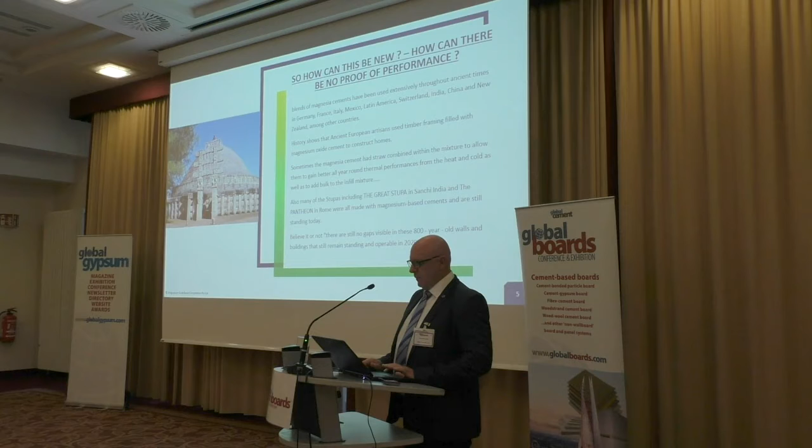History shows that ancient European artisans used timber framing filled with magnesium oxide cements to construct homes. Sometimes the magnesium cement had straw bindings mixed within it to allow them to gain better all-year-round thermal performance from heat and cold, as well as to bulk up the infill mixture.

Also, many of the stupas, including the Great Stupa of Sanchi in India, and the Pantheon in Rome, were all made with magnesium cements and are still standing today. But believe it or not, there are no gaps visible in these 800-year-old walls and buildings that still remain standing and operating in 2020.

Early magnesium cements were made with soluble phosphates from animal feces, or fermented plants and magnesia and optionally clays. These natural magnesium cements bind naturally exceptionally well to all cellulose materials, i.e. plant fibre, wood chips, etc., and were often referred to as living cements.

There is a book out there, just referenced away from this, called Breathing Walls, which is quite interesting. It's written by George Swanson. If we change the word living cement to breathing walls, it's a reproduction of what was known many years ago. This is a sharp contrast to Portland cement today, which repels cellulose.

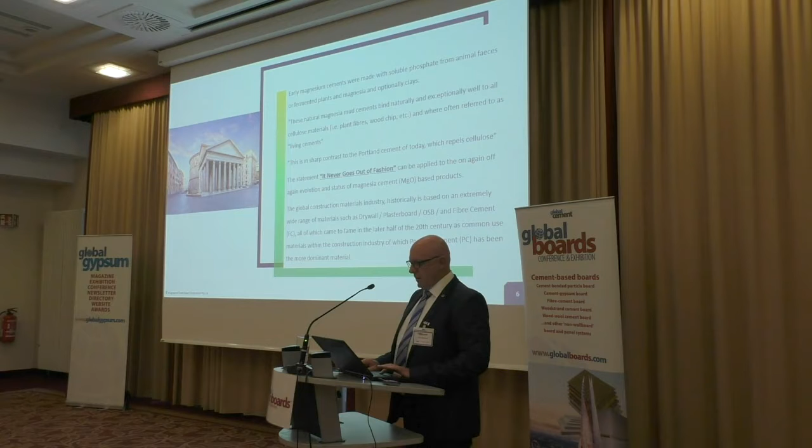The statement 'it never goes out of fashion' can be applied to the on-again, off-again evolution and status of magnesia cement, MgO-based products. The global construction materials history is based on an extremely wide range of materials such as drywall, plasterboard, OSB and fibre cement sheet, FC sheet, all of which came to fame in the late 20th century as common-use materials within the construction industry, of which Portland cement has been the more dominant material.

With the push for increasing environmental sustainability and the need for products that deliver a higher level of protection from fire and extreme weather events, we are now witnessing a renewed interest in materials that for decades have largely had niche or best curiosity value as opposed to gaining commonplace recognition and use.

This has led to research into information that has been archived for centuries, which documents the vast uses and benefits of magnesium oxide as a sustainable building material. The result of this is that magnesium-based cements, integrated with more recent advancements in modern technology, manufacturing, high levels of third-party quality control, and proven in-field performance of high-performance magnesium cement products, has industry leaders focusing more on utilisation of magnesium cement products to future-proof their projects.

Magnesium cement products versus Portland cement-based products. The carbon footprint, which we've heard about today as well, is improving, but nonetheless it's still an important factor in sustainability. The carbon footprint of MgO cement is not dependent on carbonisation during use. Its footprint is achieved during manufacture by a combination of features.

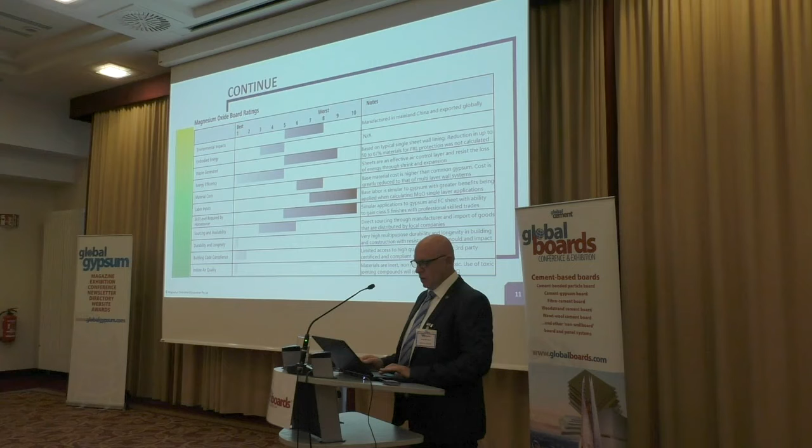The embodied energy is zero. Waste generated is based on a typical single sheet wall, so it's actually quite good. When we get into plasterboard systems, looking at fire-rated wall systems, we're using anywhere between a minimum of 50 up to 60 to 70% less material than a plasterboard wall system to produce a higher performing wall system.

In all aspects, okay, a lot of people just get their heads stuck around magnesium boards as a non-combustible board. When we talk about mold, impact, thermal resistance, CO2s, one thing magnesium cement does is it actually trumps everything to do with plasterboard. It falls very much in line with fibre cement, as we know Portland fibre cement. So there are little differences which change performance, but when it comes to performance in wall linings and reduction of materials going to waste, it's a high performer.

When we look at energy efficient air control layers, resistant to loss of energy through shrinking and expansion. To give you an idea, shrinking and expansion at minus 40 to plus 40 is less than 0.25 of a millimetre, so it's very dimensionally stable.

Later goes into materials use. I'm just going to skip through this. Sources and availability: magnesite has mainly been in China, and there are good resources for the binders readily available, whether the manufacturing was in Turkey, America, or China. The complex reason why manufacturing isn't successful in those countries is because people don't have the science or the backing of the science and technology to make their magnesium boards work.

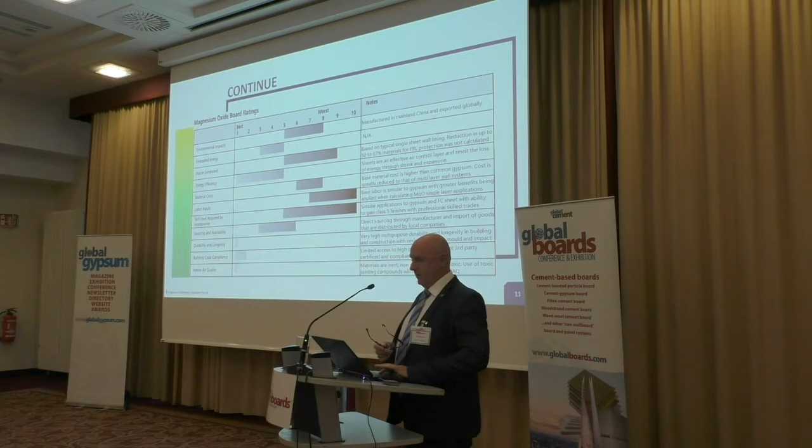Thermal mass. This is an interesting topic, and I've discussed it with a couple of people today, which has been interesting. The forum actually has a very unique, close nature in what people I've spoken to so far today, and one topic has been thermal mass and sustainability. Thermal mass and efficiency play a role in sustainable projects and are critical in delivering high levels of fire protection.

There is a strange word that is overlooked in many cases through our global building codes and is rarely used in the assessment of sustainability of projects. That word is calorific values. Calorific values are applied to materials based on the amount of heat released by unit weight or unit volume of a substance during complete combustion.

Calorific performance of products has come under scrutiny in independent testing carried out in Canberra, ACT, Australia, of leading suppliers of fibre cement sheet barrier protection boards. These tests further highlighted the risks associated with products that have medium to high calorific value scores.

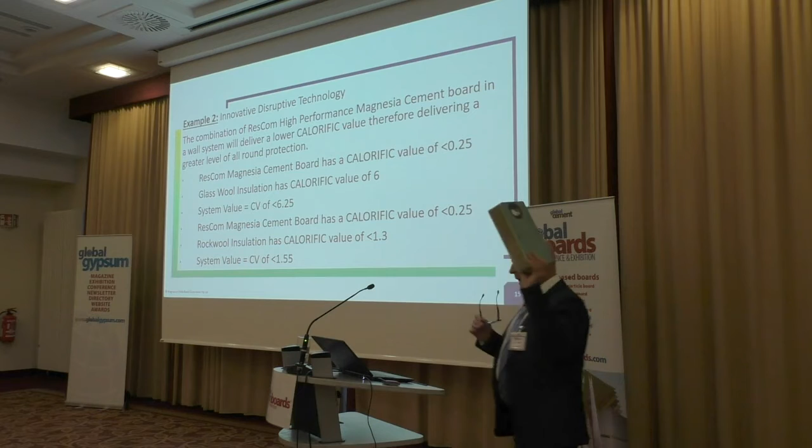But also, if we look at rock wool and its ability, its calorific value is 1.3. So 1.3 and 0.25, we're looking at a 1.5 calorific value. That's amazing. That's literally this little panel here, that with rock wool and a 10mm board either side, is delivering a system that is 500, 600% better in calorific value, so its ability to resist heat and cold.

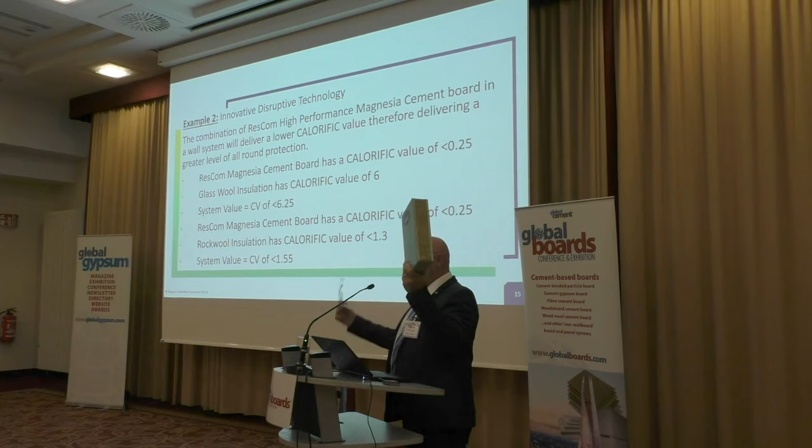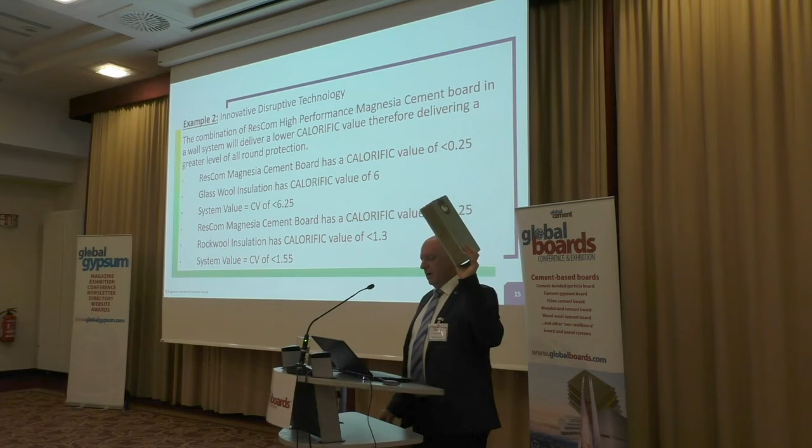So the outcome of that is our buildings are easy to manage, it costs less money to heat them and less money to cool them down. So we're looking at our holistic sustainable building. So I'm not just playing around with magnesia cement, I also want to make sure we're looking at our system.

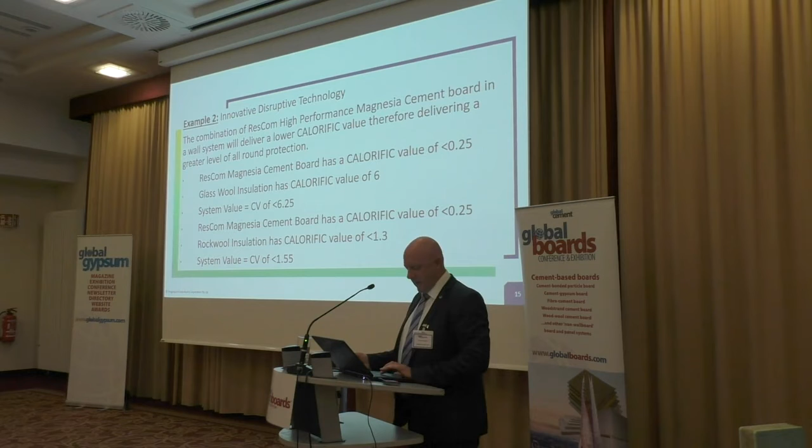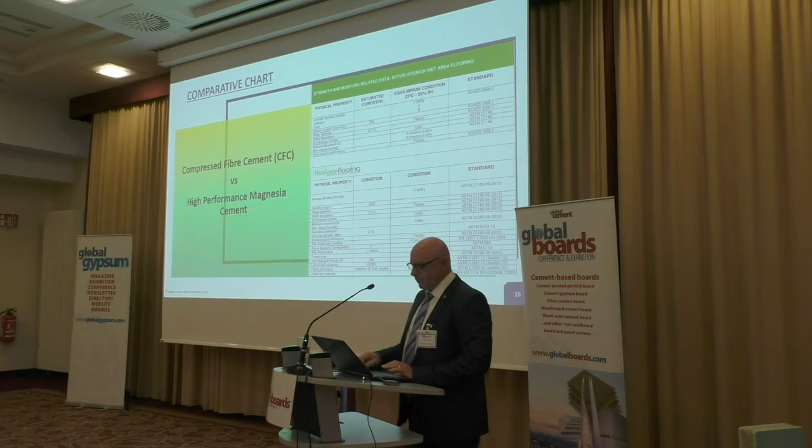MPA categories, when we look at structural performances and that, I hear that getting mentioned a few times in discussions today, but MPA value of the 22mm structural flooring and magnesia cement structural flooring in my side of the industry is probably one of the largest selling products. We document a 14 MPa as an average MPa. We run in between 14 and 23 MPa for the same thickness against the 7 to 9 MPa.

Our densities, we're running densities around about 1,000 to 1,100, where we're looking at the same product at opposition at 930. The big thing is where we come to water absorption and changes. Where we documented this, we looked at the fibre cement sheet at 42.7%, and we were at 13.2. I'm happy to show that, and I was talking to one of the binder guys earlier on.

This is our latest, very, very latest. The first containers are only now just gone into America. But this now, we've got our technology for the magnesia cement down to 3 to 5% moisture content absorption. You can leave it in, you can leave it out, you can leave it in for the next 10 years. It won't be above 5% moisture absorption content.

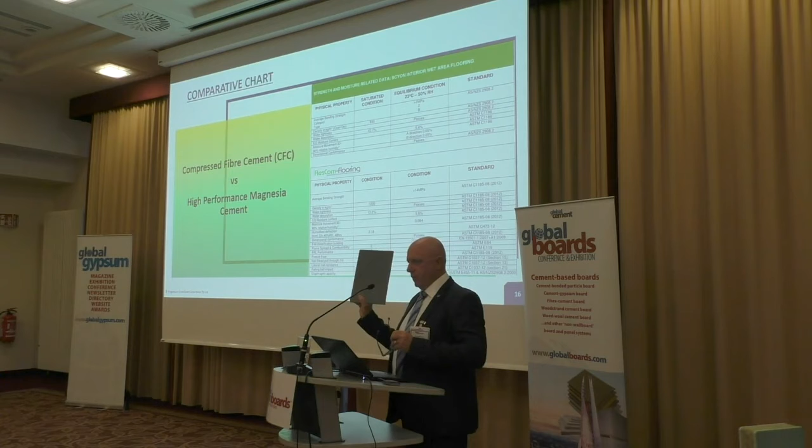So the magnesium industry now, in my sector, I can't say for all, we have been focusing a lot on the improvement, especially for exterior use and those type of things, performances, to reduce maintenance and reduce having to pre-seal or clean or whatever else. And most importantly, have a product that can be put on a building and we don't have to go and seal it before the bad weather comes, which we've got pretty much a lot of that in Australia at the moment.

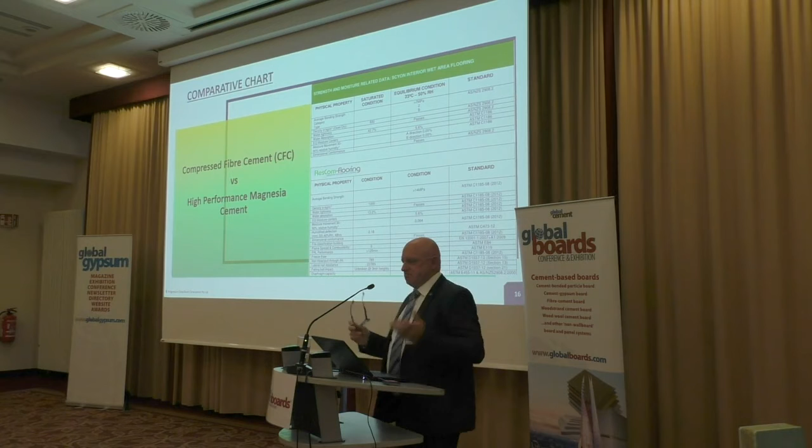So if anybody wants to feel and see that, it's a cement board. Happy enough to share it with you. I won't share the IP with you, but I'll share the sample with you.

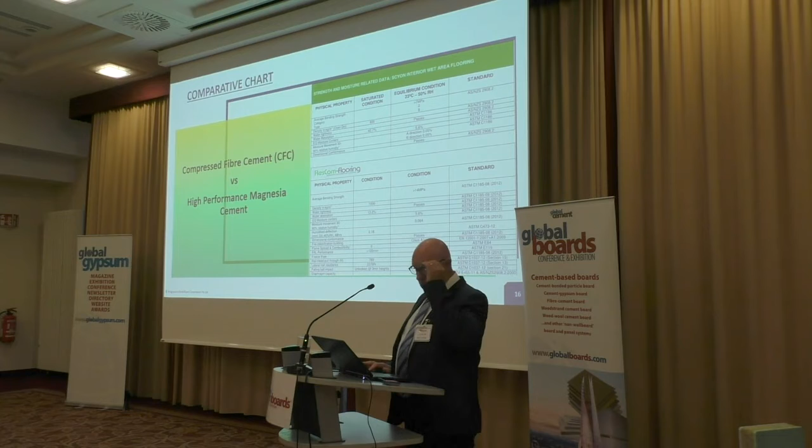All said and done regarding the abilities of magnesia cement, the big question still lingers: are all magnesia cement boards made equal? Do they all perform the same? What types of magnesia cement boards are there? What proof is it that supports the claims of performance?

Sorry. Robert, could I have a glass of water, please?

Sorry. The simple answer is no. No, they're not all made equal. No, they don't perform the same. And there are at least 6 types of magnesia cement boards that I'm aware of. MgO chloride activated boards is the oldest and longest proven high history of performance in the industry. Thank you very much.

MgO silicate board is the most used form of cement, magnesia cement board. Those in the room will know a product called Promat board, very well known and respected around the world. That's a magnesia cement silicate board.

MgO Portland cement boards are not used as much anymore because the Portland cement or fibre cement sheet industry dominated the magnesium side of it many years ago. Phosphate boards are the same, but very brittle and don't perform anywhere near as good as silicate or chloride activated boards. The big bad wolf in the room is magnesium sulfate board, which has only come about over the last 5 years.

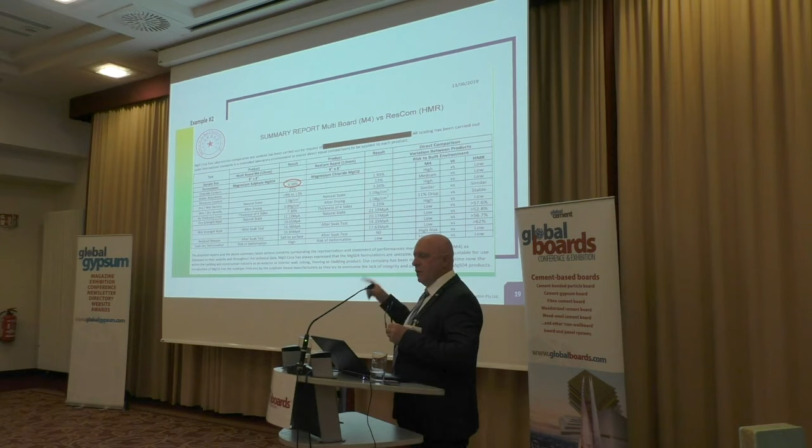But what this told us, because we already knew their formulations don't bind. When we're talking about binding here, okay—what's the binders? How are they binding? How's the science coming together? How does it give us all the structural performance?

We know that magnesium sulfate in the formulations does not bind. It does not bind, okay? We've proven it in testing the strength time after time after time after time.

I started doing it for free, now I charge, because I can't keep reporting the same thing for free.

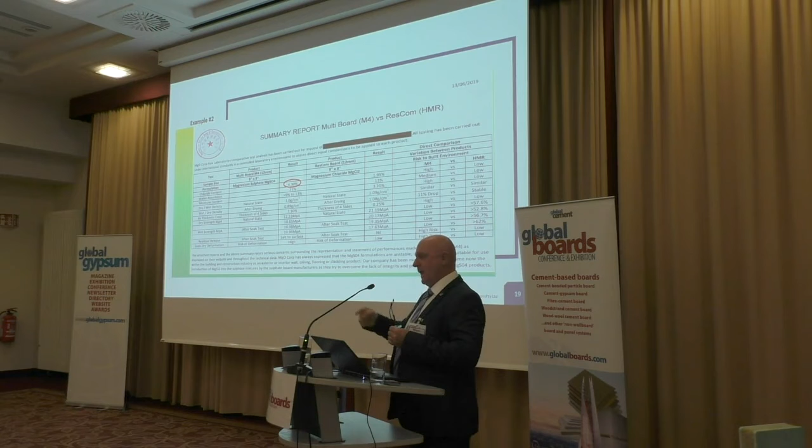Okay? So now we're knowing that they're putting magnesium chloride in the mixture to make the strength of the board, but not telling anybody. They're overdosing the mixture. Does that make sense? So it's an important factor.

I don't mind dobbing everybody in my industry. Okay? I'll tell the truth. This here is the one that really caused the big issues with the failures within the southeast corner.

You can see here again a sulfate binder board. I had to take the address—I think I accidentally left it still in there somewhere. No, I left the suburb in there. We used—they had a 9mm board.

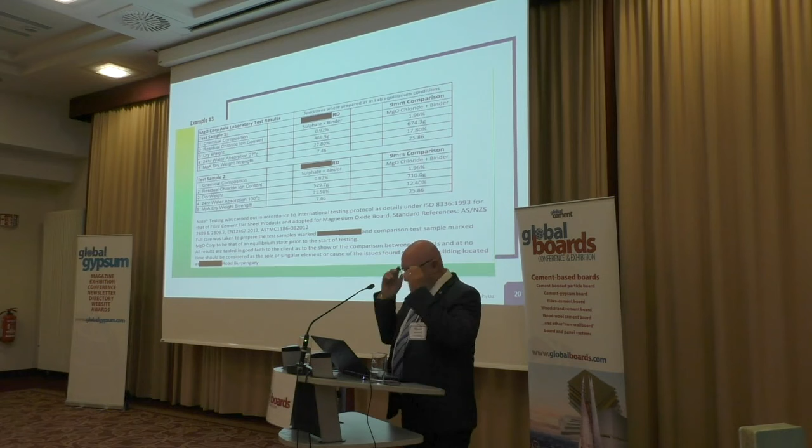We don't make a 9mm board, but get a load of this. Where you've got our 9mm board down on the side, where it says MgO chloride plus binder—that was our packing strips, from around the packing, okay?

It had been laying out in the rain and the grass for over 4 years, but it still outperformed this brand new board that was used on structural insulated panels that's now falling to pieces in 100 houses in the southeast corner.

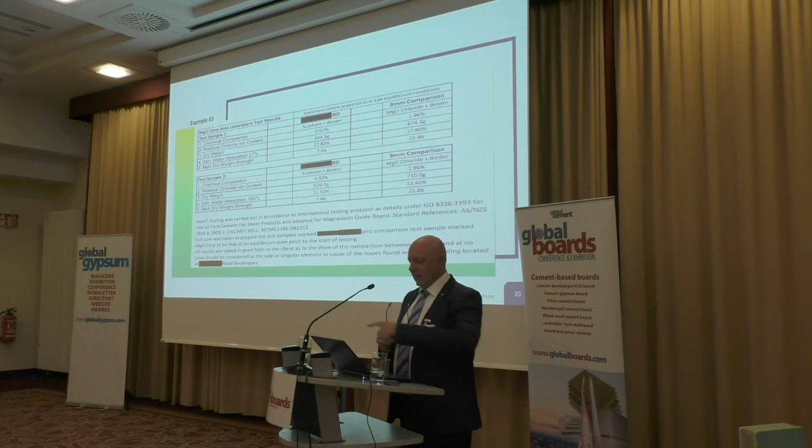So again, we can see the results on sulfate board.

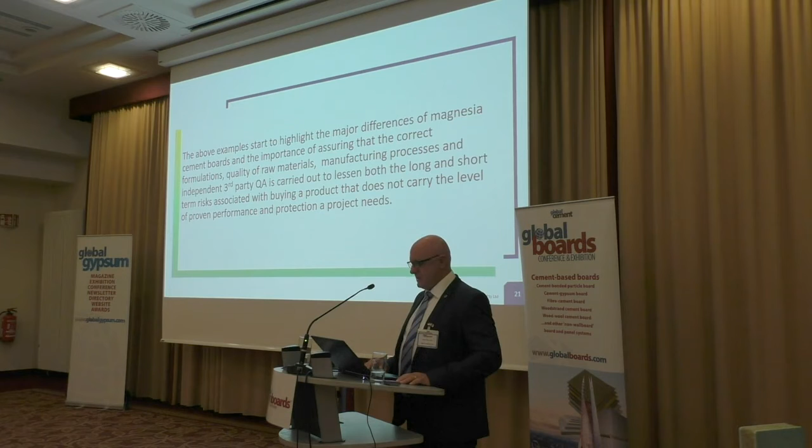The above examples start to highlight the major differences of magnesia cement boards and the importance of ensuring the correct formulations, quality of raw materials, manufacturing processes, and independent third-party QA are carried out to lessen both the long and short-term risks associated with buying a product that does not carry the level of proven performance and protection a project needs.

This is the good, bad and the ugly part. Hope I point to the right side. The ugly side, the other side. Somebody probably looked at me and said I'm pretty ugly too. The ugly side. This is basically here.

That's the panel I'm talking about. There's 100 buildings falling to pieces. This is it cutting up, getting tested.

This up here is an Australian company that used to buy a lot of product from me. So then they decided they would go to a Chinese manufacturer and buy it, and they did a big project in the Philippines. The director of the company rang me up and said, Steve, we've used your board and it's falling to pieces. I said, well, you haven't bought board off me for 5 years.

That's what they get when they went around the corner to buy a board, because it was between $8 and $10 US a board cheaper. I said, don't you think there's a bloody reason that my board's more expensive? It's the materials you use, the science you use, and do you have product liability insurance and various things like that.

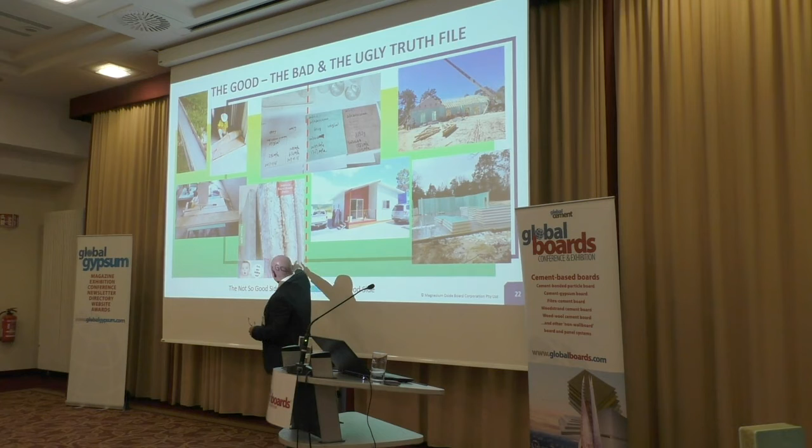This is where we started. This comes from a client in New Zealand. Here's our board he's been trying to kill for 3 years, in and out of water, trying to kill it.

There's 3 pieces of sulfate board from 3 different companies that he had in and out of the water for 3 months. They're growing stalactites out of them.

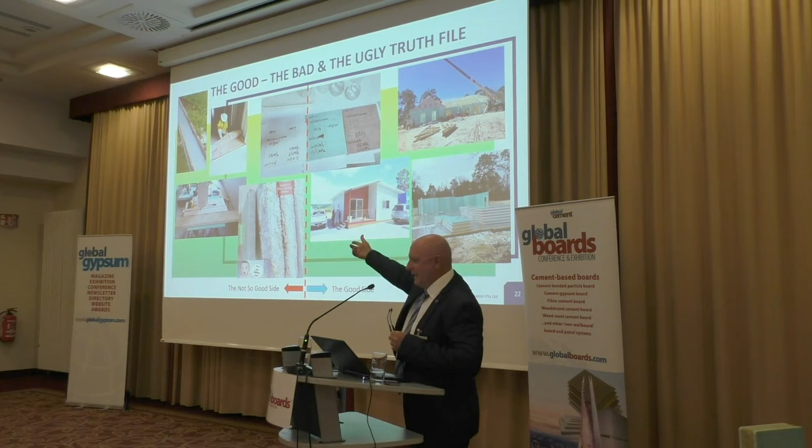So we proved this in an environmental test years ago, which I tabled for you guys back in 2018. Now it started coming from the client, and then from the client again, and again and again. So I just want to make sure that everybody knows that it's not me that's just saying it—it's the proof that's now saying it.

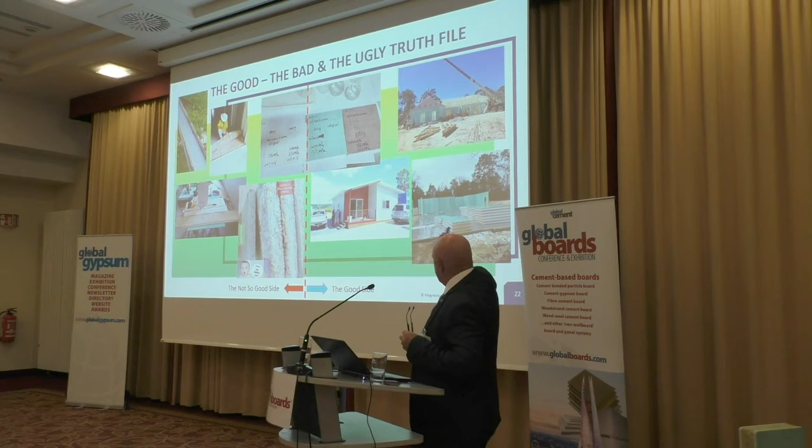Okay? The others here are projects that are getting built in America with SIP panels, Australia. I don't know how many thousands and thousands of projects we are in now around the world successfully.

Here is also the manufacturing, the good and the bad. I like Bert's presentation, and also some of you other guys have told me over time, there's a curing process, a drying process, a moisture process. I hear the same thing all over from the professionals. You're telling me what I already know we have to do.

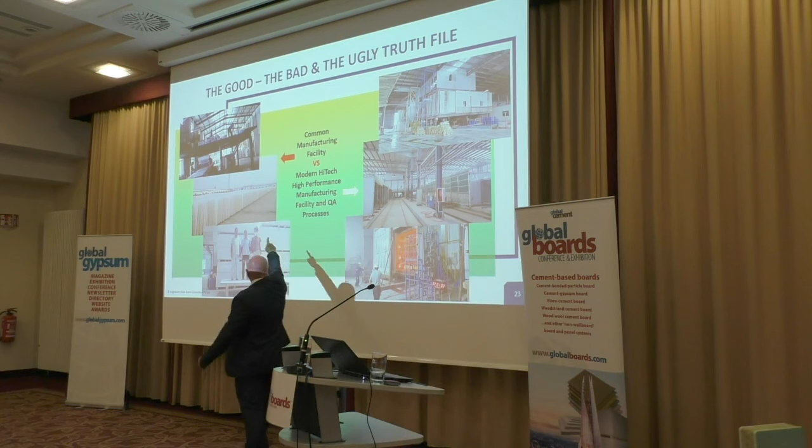Here is the controlled drying process. It's pretty cool, eh? Do you know it's important to be no more than 2 degrees up or down in the curing process of a high-performance magnesia cement?

2 degrees up or down. If we're 2 degrees up or down, in summer when it gets too hot we close the factory because of the temperature, even our curing rooms. Running down here, each side, that's our factory up the top here. When the temperature gets too high in heat, we shut the factory down because we know the curing process will be too fast.

We don't have that problem in winter now because we've got gas heating and temperature control, but in summer we do have problems with the temperatures getting way out of control.

So, you know the importance of understanding our science, understanding we also need to cure board, we also need to have time activation. We also have a dual curing process, where step 1 is demolding, take it out. Step 2, step 3, then we have the in-between cut process, sanding process, and step 4. Even when we know it goes into packaging, it cannot be wrapped and packaged to a customer until we get past a certain amount of days.

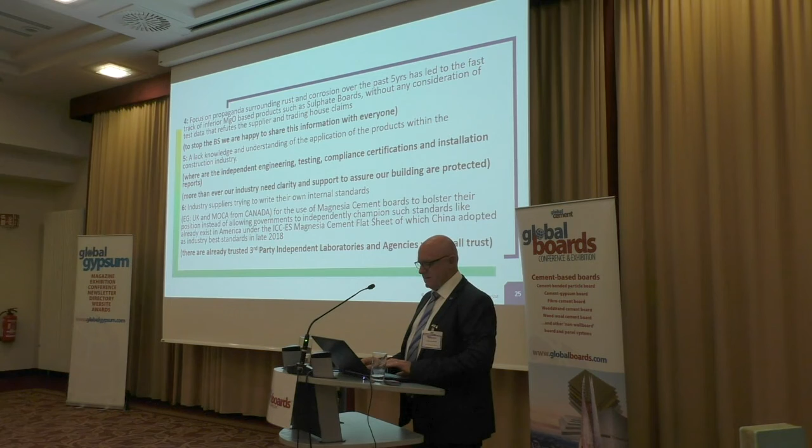Industry suppliers are trying to write their own internal standards. We have this here in the UK and in Europe, e.g. UK and MOCA from Canada, for the use of magnesia cement boards, trying to write their own standards to bolster their position instead of allowing governments to independently champion such a standard, like already exists in America under the ICC magnesia cement flat sheet standard, which China adopted as an industry standard in late 2018. There are already trusted third-party independent laboratories and agencies which we can all trust, such as Intertek, SGS, and Warrington's.

Where to now, 2020 and beyond? It is no secret that the building materials industry needs to change. We're all facing real change and challenges moving forward.

The rug is about to be pulled out from under the feet of many in our industry in regards to having to show independent third-party testing, quality assurance as proof of performance of all protective systems. Not in-house opinions or in-house engineering. The word I'll give you again was independent third party.

The past exemption clauses within many building codes have allowed for the interpolation of performances of a system are coming to an end. Watch this space. If you haven't already found that in Europe, it's coming. Australia has it. The deadline is 1st of May 2022.

Failure to comply may see insurance companies refuse to insure buildings, and compliance approvals being rejected or withdrawn. We're already seeing in Australia compliance companies and certifiers go on site and rejecting the systems that have been installed.

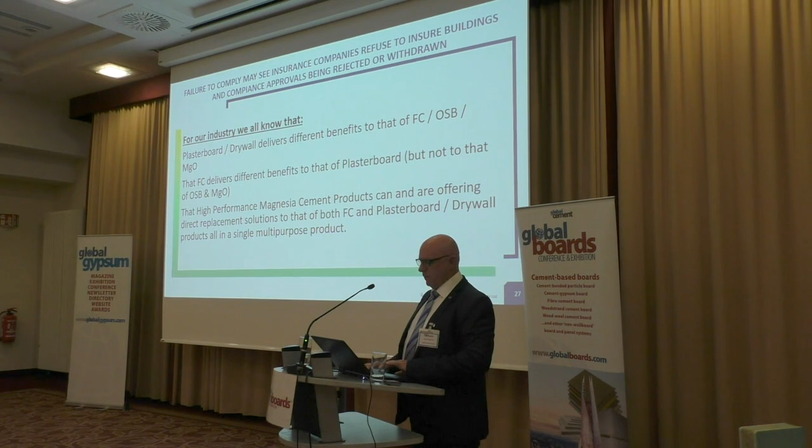In closing, I believe that not one glove fits all. That all these products have a place in the marketplace, and that will remain so. I know there are major advantages for those companies that are proactive in recognising the changes that are coming. I know of new exciting collaborations being formed between magnesia industry leaders, FC, OSB, plasterboard, drywall companies, and these collaborations are starting to deliver healthier, safer and stronger hybrid-based systems. This is exactly what our industry is looking for.

So, by Dean Hughes, sometimes when you're looking for an answer, your search is everywhere. You'll search everywhere else before you take a look at what's right in front of you. My 2018 closing message was collaboration, and that's the same today. Thank you very much for your time.